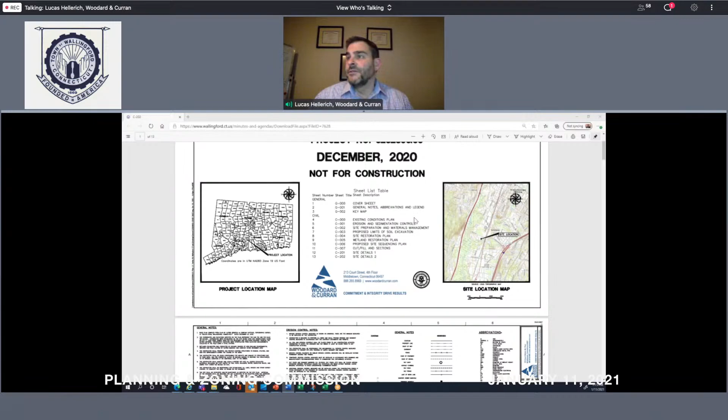Mr. Chairman, may I share a plan with the commission? Absolutely, what I will do is make you a presenter, and that should— you should be able to do that. Okay, you should be designated as a presenter now. Okay, so this is just our project drawing set which was submitted. Let me start here. Again, thank you, Commission.

This is a wetland soil remediation project. It was approved by Wallingford Inland Wetlands and Watercourses Commission on January 6th. During this presentation, I'll start with an overview of the project, including some background information as well as the proposed schedule. We'll also discuss details related to the restoration plan, and conclude with several additional points related to the application.

As has been discussed, a number of project documents have been submitted. We submitted the original permit application and a complete set of revised project drawings, which incorporated all of the edits requested through the Inland Wetlands Watercourse Commission review process. There were several comments issued by the Planning and Zoning town planner, and we responded to those comments in a letter dated October 29, 2020 from the planner. We also submitted a contingency plan for potential flooding and erosion and sedimentation.

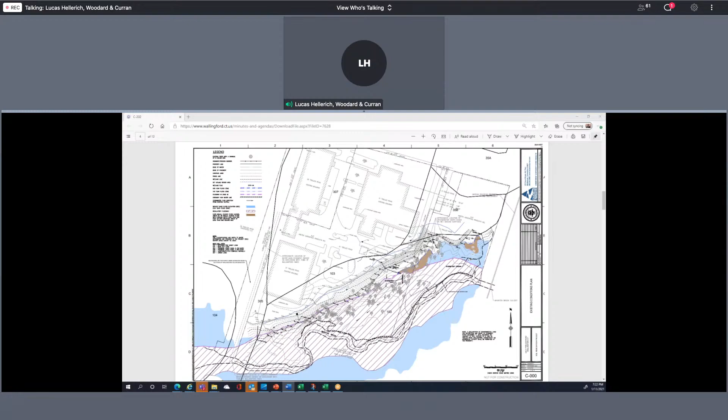On the sides of that center, we have 6-inch deep excavations. About that time, in December of 2019, we also had a pre-application meeting with both Inland Wetlands and Planning and Zoning. There were some concerns raised about the removal of all the trees, the fact that the project is within the floodway, and the potential for erosion into Wharton Brook.

In response to the meeting comments that were raised, and the soil sampling that we conducted around that time, we also conducted a tree survey. We approached Connecticut DEEP's Remediation Division, and we worked on a plan to retain those large trees and only remove soil to the top of the tree roots, so 6 inches, rather than clear cutting all those trees, which is typical for a remediation project. Connecticut DEEP agreed with that approach.

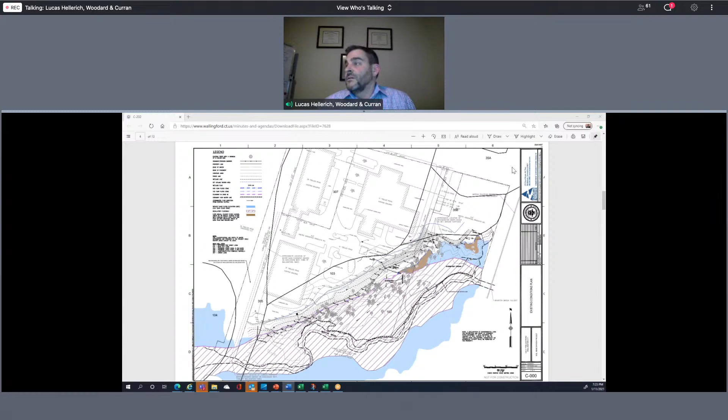Also, we prepared a contingency plan to address flooding concerns. Let's go on to another figure here.

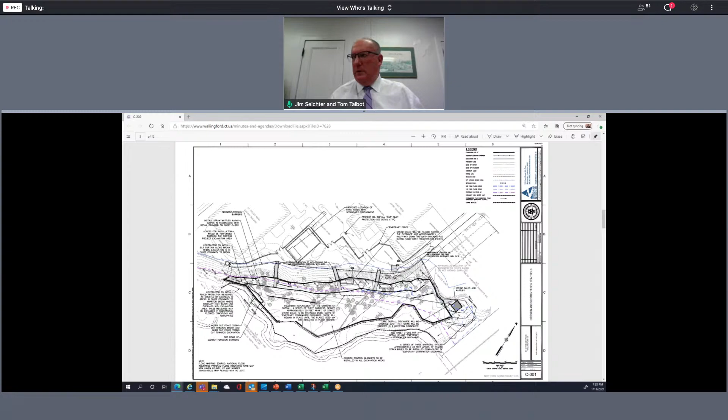Okay, this next figure is the erosion and sedimentation controls figure. I'll just briefly walk through the approach sequence here. The project would start by mobilizing to the site, mobilizing equipment, erosion, sedimentation controls, and other materials required for a construction project like this.

We would identify all trees that would be retained. We would install erosion and sedimentation controls, which really consist of a number of different devices.

Silt fence, straw wattles, a double row near Wharton Brook, straw wattles within the excavation itself, and a water diversion structure. If you look on the figure, this clouded area along Wharton Brook represents the lowest point of the project. In that area, we would proactively install a temporary water diversion structure, which would mitigate high water from that brook from coming into the excavation.

We would also install a turbidity curtain in the brook, and we have extra stocks of erosion and sedimentation controls available on site. In our contingency plan, we also lay out additional measures to respond to various precipitation events.

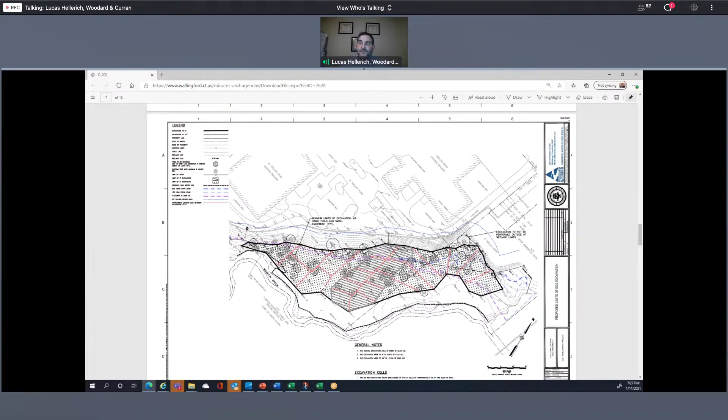I'm going to go back to C-202. If you look at the center of the figure here, you can see there's a bold black line, kind of an odd shape that surrounds this area. That represents the total excavation area.

Within that area, there are two thicker gray lines that go from north to south. Within those two gray lines, that's the 2-foot excavation area. And then on either side of those gray lines, there's a 6-inch excavation area, one on the east and one on the west.

Once those excavations are performed, we would backfill in the 6-inch areas with an organic topsoil to mimic conditions in the wetland. And then in the 2-foot excavation area, the top 12 inches would be backfilled with an organic topsoil.

The bottom 12 inches within the excavation would be backfilled with a sandy loam soil, which is similar to what exists at the site. Backfilling would be prioritized around those trees, and it would also be prioritized in the lower elevation areas as well, to allow for the most time for site stabilization to occur.

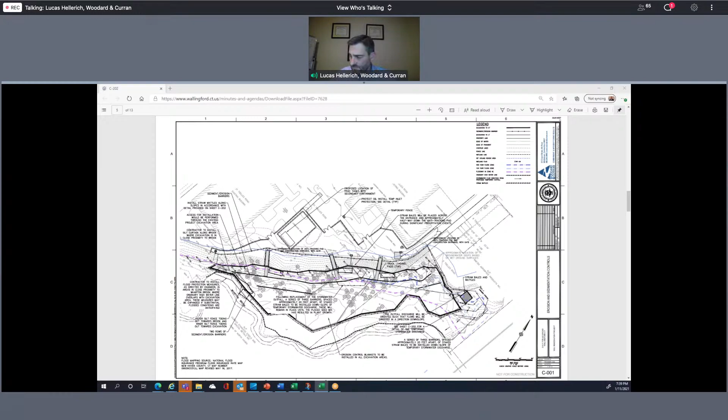Okay. And then I noted on your presentation, you talked about the project schedule, and it said late spring, summer, could take several months, should be several weeks. I guess, could you further quantify beginning to end, how many weeks is this expected if the weather conditions are ideal?

So incorporating all the steps of mobilizing the site, establishing erosion sedimentation controls, clearing trees, establishing the temporary stormwater, performing the excavation work, performing the backfilling work, restoration work, I think all that's going to be somewhere on the order of 12 to 16 weeks, all told.

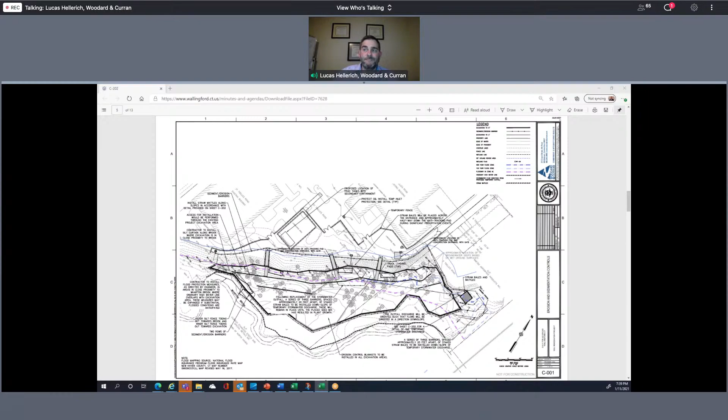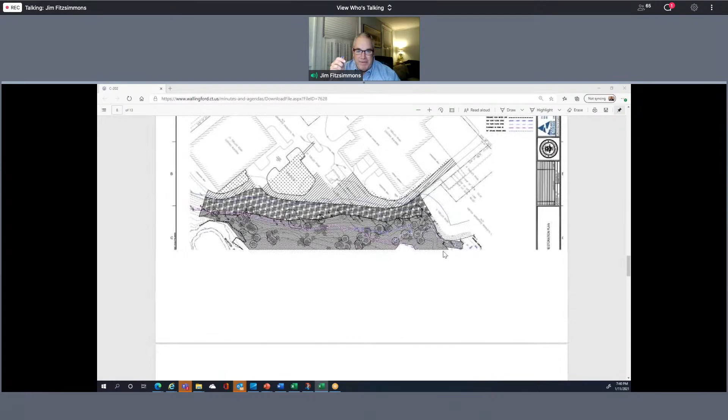Okay. And if I could add, the chairman had some questions regarding the temporary staging area, and I guess I too am concerned about it. I heard your answers to his questions, but you have three particular areas. What would the height be of those areas, the maximum height of those particular areas?

Let me see if I can find the detail for you. We don't list the maximum height here, but it's going to be something on the order of 8 to 10 feet at most.

And so the 8 to 10 feet would be, if I understood your explanation, always covered in plastic at the end of the day and secured. And the most they would be there would be several weeks. Correct. And, oh sorry, go ahead.

So yeah, at the most it would be several weeks, but I anticipate it could be as short as a couple days. Once a certain volume of soil has been excavated and placed in that temporary location, it may only be there a couple days before it's shipped off site. But it may need to stay there a bit longer as well.

And then, I'm sorry, I'm going to go back to the trucks. The truck route is going to be Toelles to 5 to 91, or is there a different area? Because I heard you say, and I don't know if you weren't clear, do you know where the contaminated soil is going and where the new fill is coming from, as it pertains to truck traffic? Right, there are several potential disposal locations.

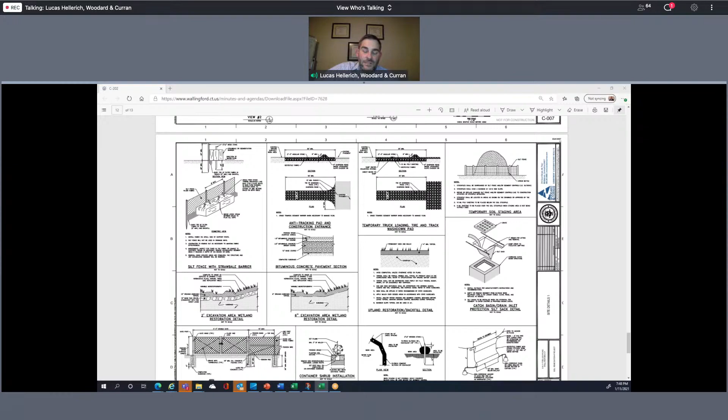So this project, this site is subject to the Connecticut Transfer Act, the Property Transfer Act. There are a number of areas of concern on the site that have already been remediated, dealt with. This represents one of the last areas on site to have that remediation done.

So that's the driving requirement, the Property Transfer Act, and the remediation standard regulations need to be complied with to complete the remediation of this wetland.

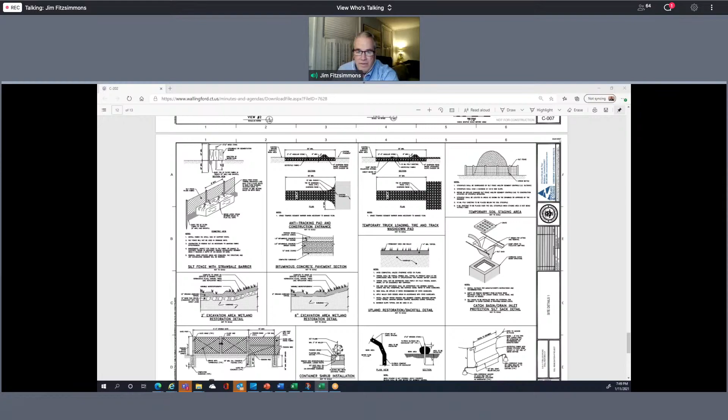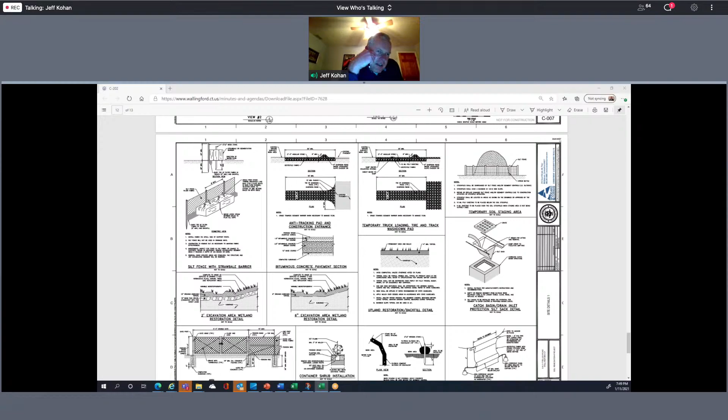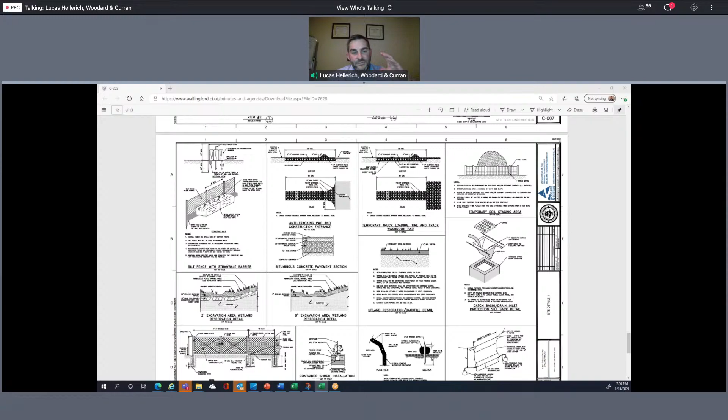Following on Commissioner Fitzsimmons's question, do you know what the concentration is of the contaminated soil as far as the nickel, and how that concentration compares to an unacceptable level? The nickel concentration, I don't remember the specific maximum value, but I think it's on the order of several hundred milligrams per kilogram. It's below the human direct exposure standard, but site-specific ecological toxicity testing using site soils developed a number below that several hundred milligrams per kilogram of nickel on site. So there is nickel above that site-specific toxicity limit, and that's how we define the limit of excavation, to remove that concentration of nickel.

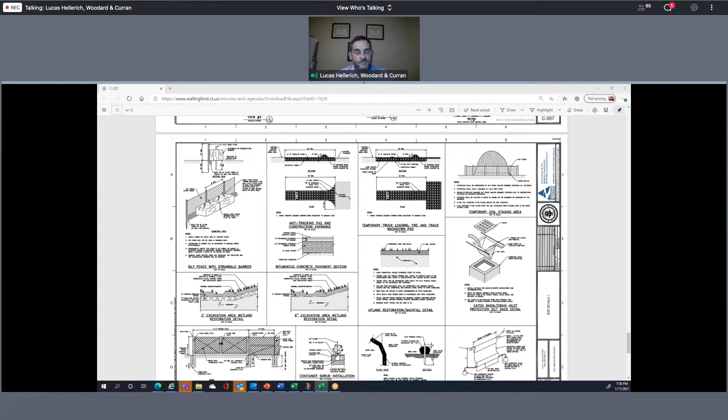So what I understand is the entire site is not over that limit, it's just specific areas you've tested and found above the acceptable range. Yes, it's soil in the top 6 inches. This bold black shape represents the excavation limits. We have soil within the top 6 inches of the western and eastern thirds of this area, and soil in the top 2 feet in the central portion that contains nickel above that standard.

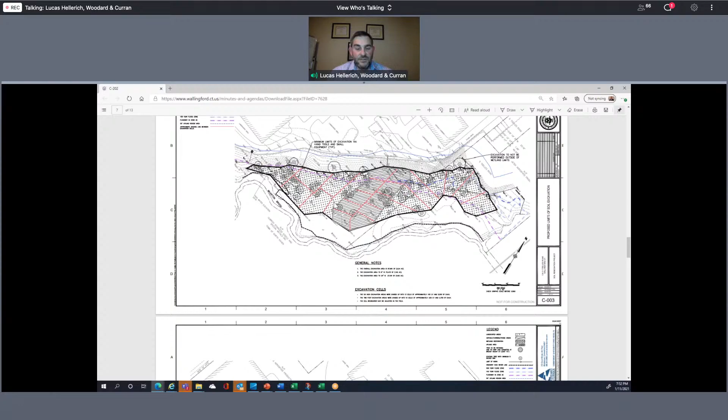Okay, I was a little unclear as to when your projected start date will be. Right now we're anticipating the projected start date would be late spring, something like late May, early June timeframe.

One of the things I'm going to ask about - I'm sure the Wetlands Commission did a great job, I read through a lot of their concerns, the protocols and procedures. I think they did a really great job getting all the environmental wetlands concerns contained. But I didn't see anything, and you didn't mention today, on your Eastern box turtle protocols.

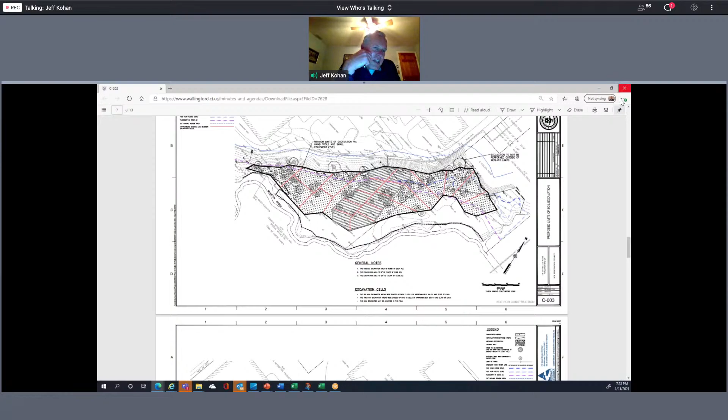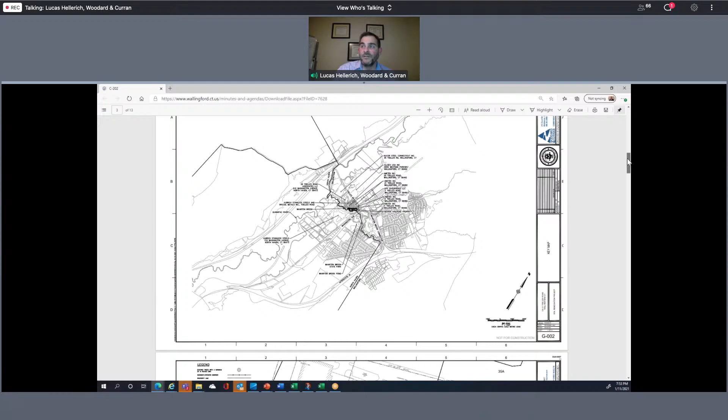Have you reviewed the site yet to see if there are any of those turtles out there? Well, there was a tabletop review done that identified the Eastern box turtle as a species of special concern in this area. Let me check my notes here. We did include Eastern box turtle protocols.

Yeah, I'm looking at it. And what we're going to do is have a qualified herpetologist with expertise in the Eastern box turtle perform a pre-construction survey at the site. As part of the inland wetland comment response, we incorporate these protocols as well - that herpetologist will visit the site during construction to conduct inspections for the turtle. The herpetologist will also provide training, and we would develop a plan prior to the start of the project to train the construction staff in identification and proper handling of the Eastern box turtle, so that if the herpetologist isn't there on a particular day, staff know what to do if they encounter one.

Okay, fantastic. And my last question, dovetailing on a comment Mr. Fitzsimmons made - I noticed in our notes that DEEP reviewed the plan but didn't offer any comments back, and our own engineering department also reviewed it and didn't have any comments one way or another. I'm sure they gave you feedback, and no comments, I guess, are good comments. But I just want to ask, in conversations between those two parties, were there any other concerns that may not have been shown here? I would not think so, but I'm just not seeing any feedback at all.

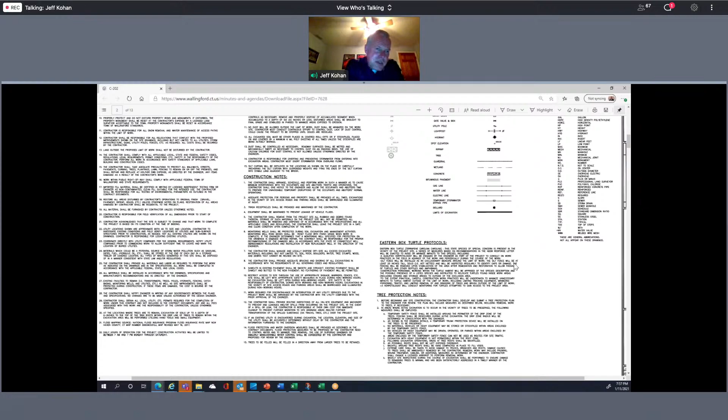Okay, good enough. Based on the documentation here in your presentations, I'm pretty pleased with the plan. So thank you. Thank you, Mr. Kohan.

Mr. Matarazzo, any questions for the applicant? No, Mr. Chairman. Thank you. Mr. Hine.

Thank you, Mr. Chairman. I just have a couple follow-up questions. You did mention Connecticut DEEP and the Army Corps of Engineers and the US EPA had all reviewed your plan. We just talked about Connecticut DEEP, but with respect to the Army Corps of Engineers and the EPA, did you actually get approvals from them, or was it just that they reviewed your plan and didn't have any comments?

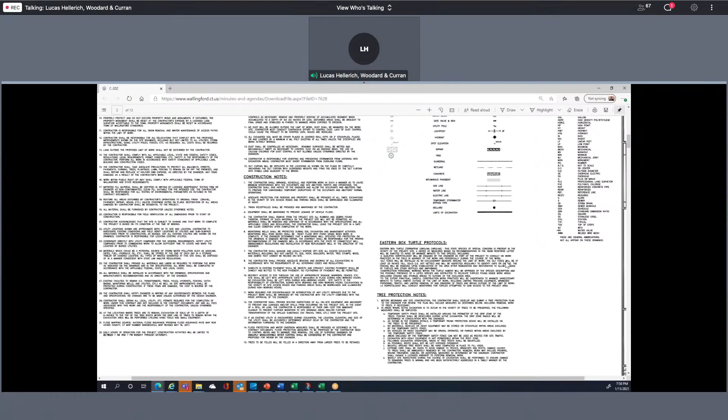Army Corps, we're still waiting on the permit approval from Army Corps. It's a general permit that we're seeking from Army Corps. And we did have discussions. They had some questions, really to review the plans that we've submitted. They've asked that as we revise these plans, we send them the updated versions to make sure they have the revised versions.

US EPA reviewed in terms of the inland wetlands restoration plan. So US EPA had provided their comments to Army Corps, and they agreed with our restoration plan in terms of the plantings, the monitoring protocols, and the invasive species work as well. But we are still awaiting an approval from Army Corps. And do you need that approval before you can begin? Yes.

You also mentioned your monitoring protocol after the project is complete. I think if I understood you correctly, you said that the monitoring would continue until full performance metrics were met. I was a little unclear as to what that means. What metrics are you looking for, or are you looking to attain?

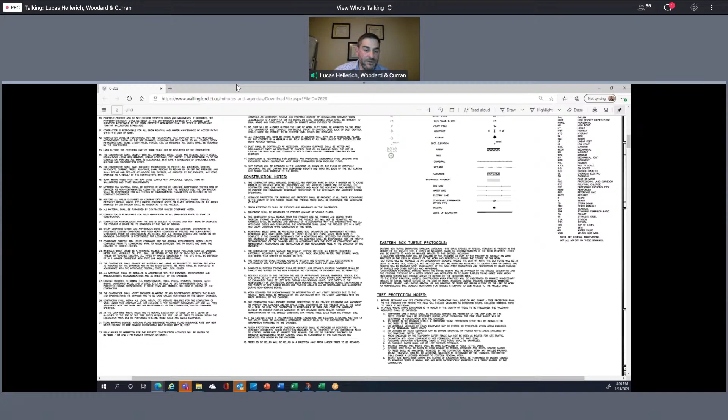So it might be a good idea to have Kyle Papigian, one of my colleagues, respond to that, because he was one of the primary authors of that plan. Sure, this is Kyle Papigian, I'll jump in here.

Like Luke had said before, the goal is really to meet these performance standards that we've established in the wetland restoration plan. They're around making sure that the site is stable, that the soils are stable at a baseline level that needs to be met. There are also several criteria related to vegetation cover, so there needs to be an adequate level of vegetation across the site, and then an adequate amount of woody vegetation, trees and shrubs, and coverage of those types of species at the site.

There also needs to be a demonstration that the trees and shrubs are growing on a year-to-year basis, because it is a floodplain forest, so we want to make sure that habitat heterogeneity is maintained in the future. And finally, there are metrics related to invasive species, maintaining coverage as low as possible on the site and below a total cover of 10%.

So in order to ensure those criteria are being met, the site will be monitored twice a year for up to 10 years using monitoring plots that will be established so they can be visited on a year-to-year basis. There'd be no discussion of ending the monitoring until at least two of our monitoring reports indicate that those criteria are met.

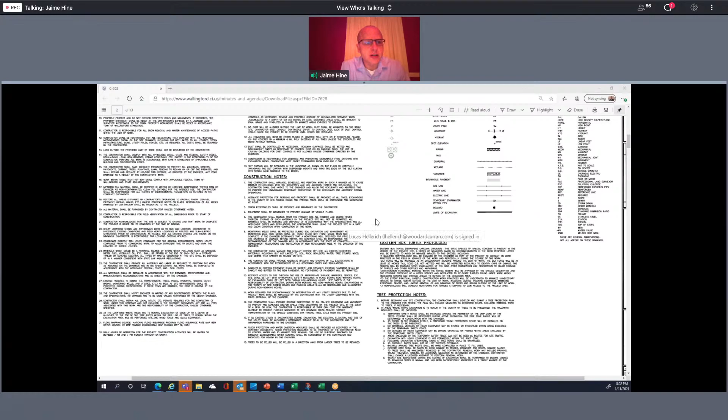The other question I had is that earlier there was a diagram that was put up that showed each of the cells that would be excavated and then filled. I was just wondering, if I understood correctly, each cell would be excavated separately. Will there be some sort of barrier put around each cell as it's being excavated in any way to prevent contamination?

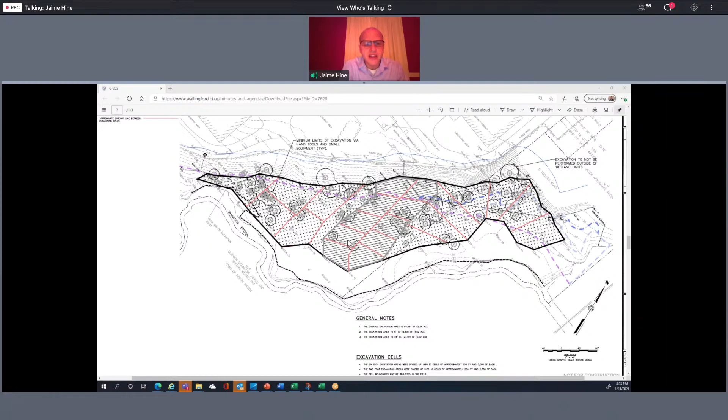Well, so this is the diagram that you mentioned. Each excavation cell is approximately— the 6-inch cells were designed to be about 100 cubic yards each in volume, and the 2-foot excavation cells were designed to be about 200 cubic yards each. In terms of barriers, in the 6-inch areas, we would envision that we would have to mark out those cells in the field, and the excavation would go down 6 inches. We did not envision placing a barrier between the cells, just because of the shallow depth of that excavation.

In terms of the 2-foot area, again, it's a 2-foot deep excavation, and we didn't envision placing a type of barrier between an excavated and unexcavated area. We don't envision there would be significant movement of soil between the cells, given the nature of the organic soil that's out there right now.

Yeah, fair enough. And just so that I understand the process for each cell, each cell will be excavated.

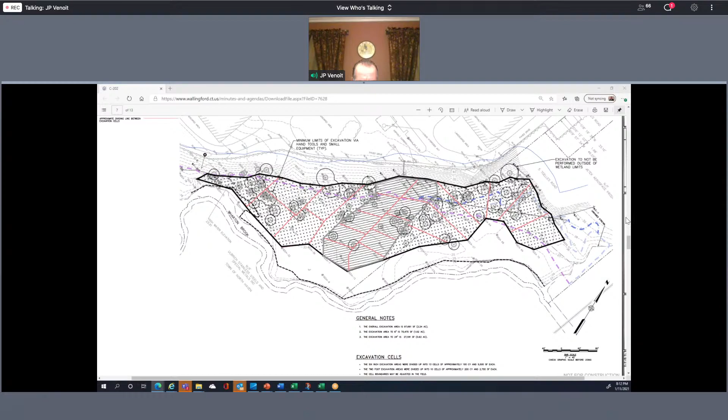Dated August 2020, amended to December 2020, subject to: 1, comments and interoffice memorandum from the fire marshal to the Planning and Zoning Commission dated August 12th, 2020. 2, comments in interoffice memorandum from Eric Kruger, Senior Engineer, Water Sewer Divisions, to Aaron O'Hare, Environmental Planner, CC to Thomas Talbot, Town Planner, dated August 27th, 2020.

3, comments in interoffice memorandum from the Department of Engineering to Thomas Talbot, Planner, dated January 8th, 2021. Number 4, comments in interoffice memorandum from Aaron O'Hare, Environmental Planner, to Thomas Talbot, Planner, listing all conditions of Inland Wetlands Commission approval, number A20-7.1, dated January 8th, 2021. All conditions of that approval incorporated into application for special permit number 409-20, with the exception of condition number 12. And number 5, sedimentation and erosion control bond of $20,000.

And Mr. Venoit, if I could add just one more, the obtaining of an Army Corps of Engineer general permit.

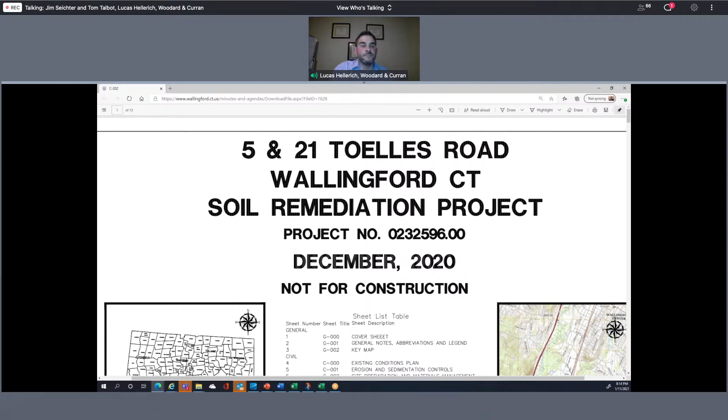Okay, it brings us to our next item. It's a continuation of a public hearing. It's a zoning text amendment, sections 4.9 IX, section 4.10 I5, and section 4.13, the Watershed Protection District, 2.1 and 5.1C.

And I'd ask Mr. Matarazzo if you would please read all additional correspondence for this application. Mr. Chairman, we have correspondence, Office of the Mayor, dated January 5th, 2021, to your attention, Chairman Seichter, and signed by the Mayor, William Dickinson, Janice Small, Law Department, Timothy Ryan, Economic Development, and Rick Hendershot, Director of Utilities.

Good, and if you would, because it's a relatively short memo, would you please read it too for the record? Sure.

Referencing zoning text amendment, sections 4.9 IX, section 4.10 I5, and 4.13 WPD, 2.1, 5.1.C, 6.1.C, and 6.12.B. Dear Commissioners, due to the serious legal and policy concerns about the proposal changes, we are requesting additional time to develop thoughts and language for consideration of the Planning and Zoning Commission regarding the 902-20 application. We request that the current amendments be withdrawn. The undersigned will be meeting to articulate relevant language and will provide such work product by March 31st, 2021 at the latest. Thank you for your consideration.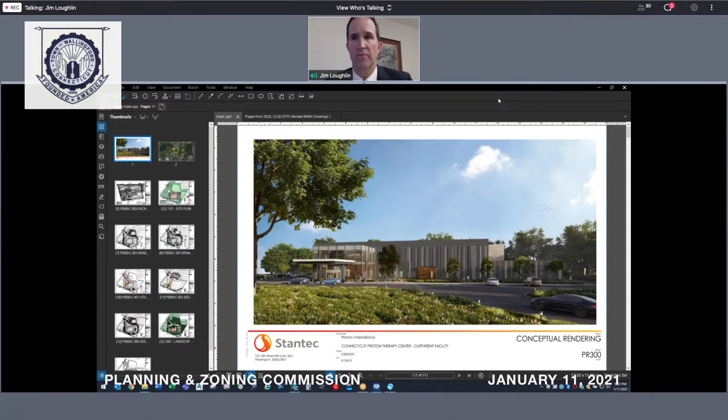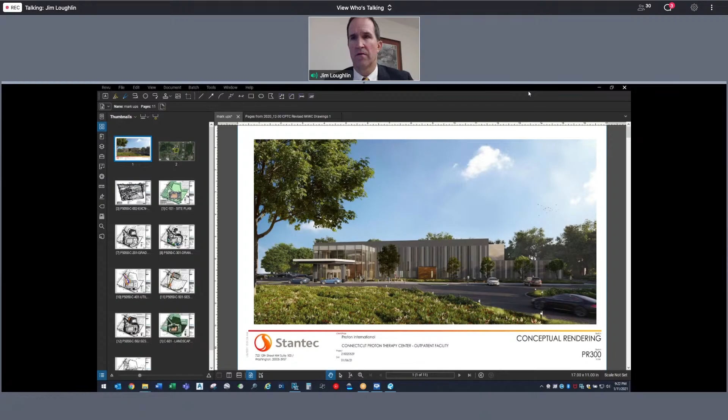There is a rendering coming in from Northrop Road. Architecturally, we have 3 architects on staff here tonight who could comment better than I can. It's a pastoral setting—we've preserved as much of the trees as possible. Everything in its design is meant to ease the entrance of the cancer patient from Northrop Road into the facility.

You'll see the atrium there is full height and glass, and the waiting area is really well sunlit. In addition, there will be some visibility from I-91 that will also make travel to the site a lot easier. It's 2 stories, with all entrances on the first floor. The pastoral setting on the outside is designed to relax the patient and ease access, and the layout inside during the waiting period, with only 1 treatment room, is all designed to cater to the patient.

Please direct any questions you might have on the design to the architects, because obviously my knowledge is limited. Thank you for that, Mr. Chairman. If there are no more questions for me, I'd like to move on to Andrew White.

Thank you, Jim. I'll now walk you through the site itself.

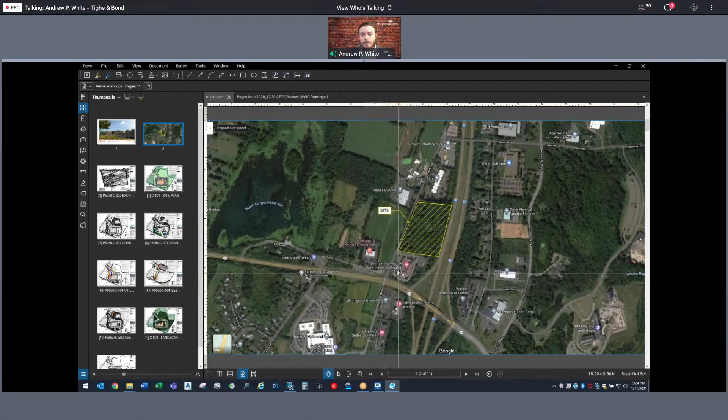As Attorney Laughlin mentioned earlier, our site is located north of the Marriott, on Northrop Road, north of Route 68, and west of Interstate 91. All access to the site will be via the exit ramp to the south of the property and then north onto Northrop Road. The existing site is 11.79 acres, almost entirely wooded.

There's a man-made drainage swale that runs north to south through the site. For your orientation, north is oriented to the right of your screen. There are a series of catch basins on Northrop Road that discharge onto the site. Approximately 90% of the site stormwater, any rainwater that hits the site now, comes down to a culvert located on the south edge of our property, a 24-inch pipe that goes beneath the Marriott's parking lot. A small corner of the site discharges directly to 91.

The site plan itself, for the remainder of these sheets, north will be to the top of your screen with Northrop Road on the left-hand side. As we mentioned before, we received a parking variance for 50 parking spots. We have our site driveway off of Northrop Road that comes to the front of the building. The front entrance is located on the north. The majority of the parking is located to the east, as well as additional 9 spaces to the north, and then 2 loading spaces and additional spaces to the west.

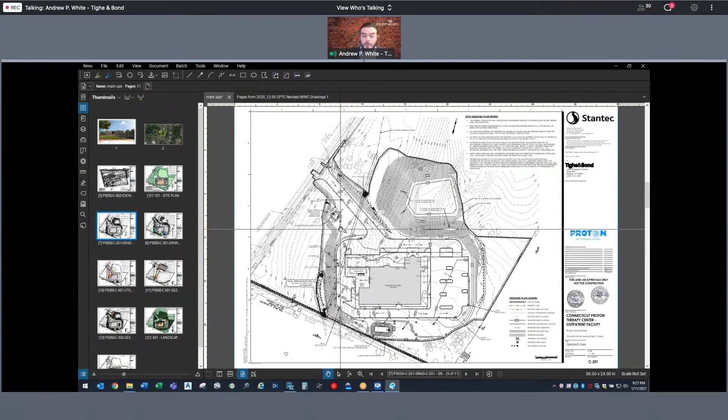Site grading is very nominal, between 4 and 2% slopes throughout the parking lot. There are 3 to 1 slopes on the west side of the site, as well as slopes surrounding the site in the swales. In addition, when talking with the water department, we have provided sand filters to meet their stormwater requirements, which I'll now discuss in more detail in the stormwater design.

This site, as I mentioned earlier, has a drainage swale running north to south. We're proposing to intercept that drainage swale through a 24-inch culvert to route it through our driveway and then discharge about 100 feet north of the existing 24-inch culvert at the south end of the property.

Per Wallingford Water Department regulations, we have 2 stormwater systems. We have storm drains that collect exclusively from landscaped areas, shown in dark blue, that discharge to swales, ultimately to the 24-inch pipe. Then we have the drainage system highlighted in cyan, which picks up paved areas and goes to 2 sand filters, as well as water quality hydrodynamic separators, per the aquifer watershed protection requirements.

The building itself is treated as clean water and has a subsurface underground infiltration system. The rainwater discharge from the parking surfaces, after the sand filter, goes to its own underground infiltration system. So for this project, we are reducing peak flow offsite and volumetric runoff offsite, and there will be no impact downstream.

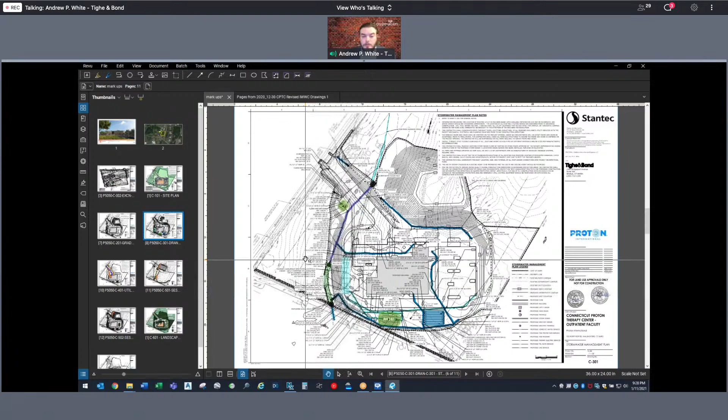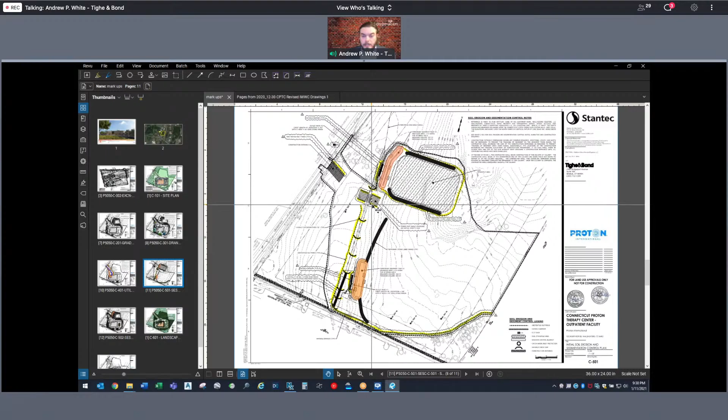During the construction process, we have fully compliant State of Connecticut soil erosion control methods. For this project, due to the presence of that drainage swale, we have broken our soil erosion controls into 2 phases. The first phase, as shown here, is for stripping the site of its organic topsoil and protecting the swale and access to the site. We have 2 temporary sediment traps shown in this first phase, one for our stockpiling activity, the second for the majority of tree cutting and clearing, as well as hay bale check dams in the drainage swale, silt fence construction entrances, and even temporary timber swamp mats for vehicular traffic across the drainage swale.

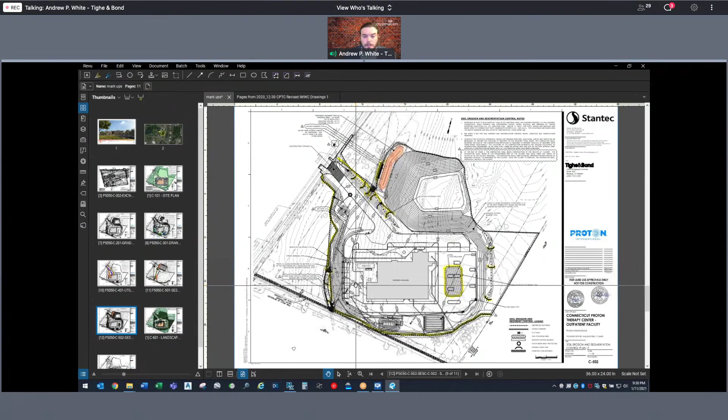For the second phase of soil erosion control, this is as the building is more advanced. As the foundation goes in, the first sediment trap would be decommissioned after the culvert is installed and bypassed, and the site begins to be raised. The second sediment trap stays for the north area, and we have stockpiling within the parking area as it's flattened out, and then perimeter controls throughout the site to maintain any silt and sediment coming off the site.

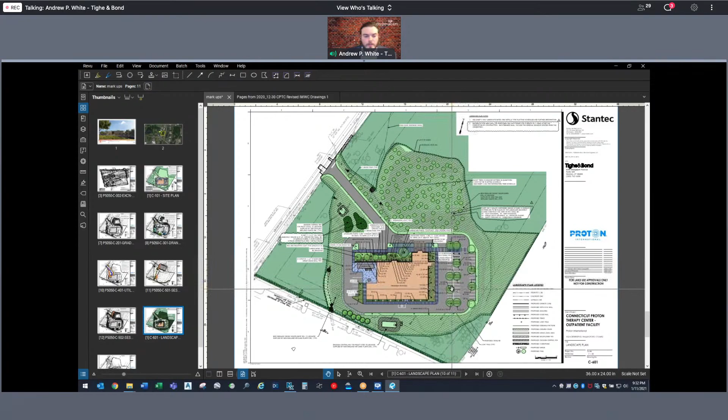And our last plan I'll show you is our lighting plan. We have poles located around the lot to provide approximately 1-foot candle average light around the driveway and building, as well as decorative light bollards as you're coming down.

And then the front landscape area will have little 10-inch tall bollards along the front walk to provide some additional ambiance lighting, not so much as site lighting.

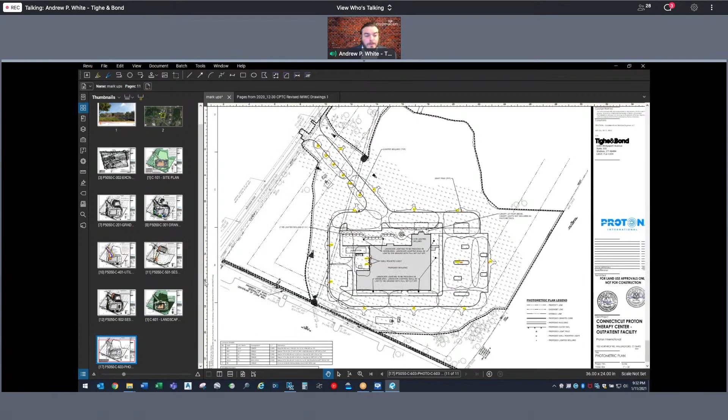And that is the project in a nutshell. I'd love to open it up to any questions from the commissioners.

Attorney Lockland, I take it at this moment this is the extent of your presentation, is that correct? Yes, Mr. Chairman.

All right, so at this point in time, I would open this up to questions from commission members. And again, we will start off this time with Mr. Venoit. No comment. Thank you.

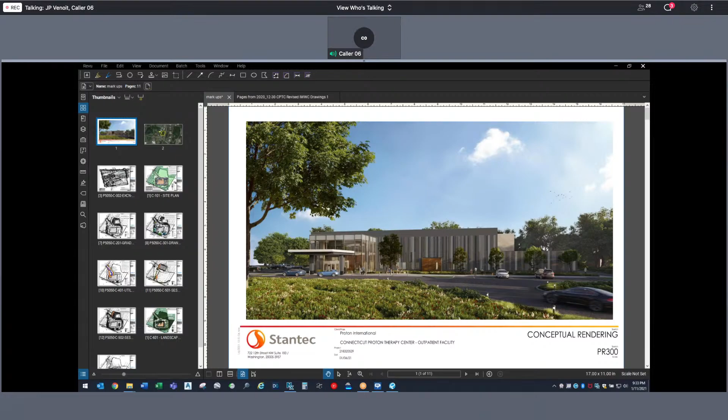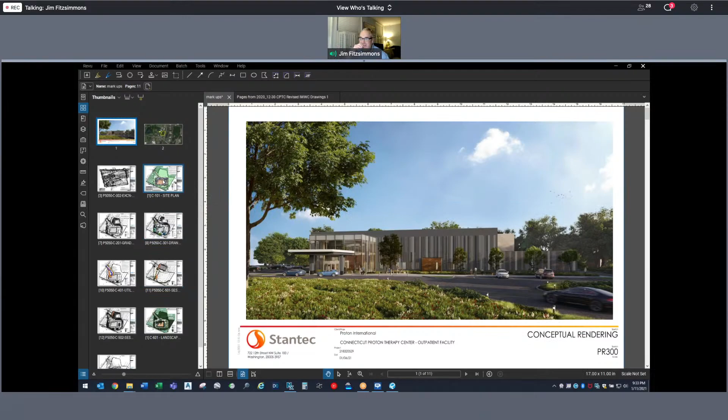Mr. Fitzsimmons: Thank you, Mr. Chairman. Just a question. I think it's a very interesting design, but as you were going through the presentation, I was trying to determine the front of the building, because Wallingford has a building orientation zoning requirement, and it looks as if the building is askew on the lot. Where is the front, and is it facing Northford, or is it on the side view of Northford?

Go ahead, Andrew. The front of the building, if you can see my cursor here, is oriented to the north. So this protrusion of the building, where the car canopy is, is the main entrance. So as you're coming north on Northford Road and take a right into the site, you have a direct line of sight to the front face of the building, which is the view shown in the rendering. So while the building is not directly perpendicular to the road, along your line of sight entering the property, you have a direct view of the front of the building.

I guess my thought would be, I would envision the majority of the traffic would be coming from the other direction. You wouldn't be getting much coming from Northford to 68, to be coming off 68 onto Northford. Correct. Yeah.

I guess, if I could, Mr. Chairman, through you to Mr. Talbot, is this plan in conformance with our zoning building orientation requirement?

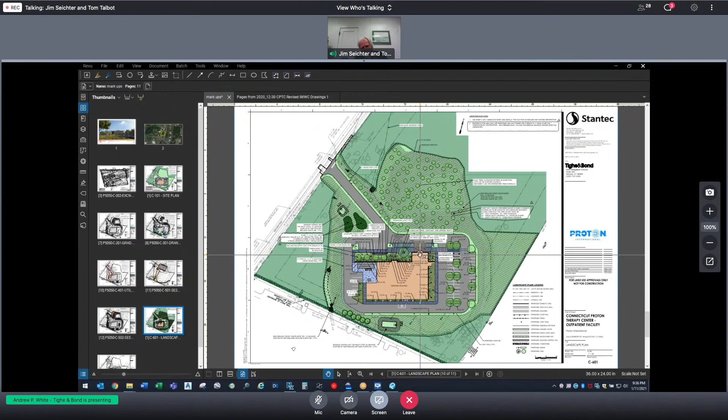I'm hearing you. I would say substantially it is. I think it meets the general intent of the regulation. I understand your concern that it's not lining up directly with the street. This is the first time I've encountered this regulation here in Wallingford. That kind of regulation with front entrances is usually more of an urban regulation where everything's along the street, and you're trying to orient along the street. Here, you're a couple of hundred feet off the street, so I think generally it does comply. It complies with the intent.

Okay. Without moving the building, where else would you put the entrance to make it more in compliance, I guess, would be what I'd say. Does that make sense? It does, and I appreciate your comments, Tom.

I think my concern was just, I know we had put that regulation in the books just a couple of years ago, and it was because of retail. There was a retail application that skewed the building. But this is, you're right, it's a pastoral setting. I mean, the applicant said it themselves. I don't want to be saying well, we approved it, but it doesn't conform. If your position is it substantially conforms, I tend to agree, it's just angled differently, and it's not going to be a straight angle.

Other than from looking at the plan, if it was to the left, the south side, you could say that it's more in compliance, but it's not at all in the spirit or the intent of the regulation, and the other two sides, not at all. So this is a situation like this, you kind of have to do the best you can with that regulation, I think. Because you referred to retail, it's not just an urban thing, it's also a highway thing.

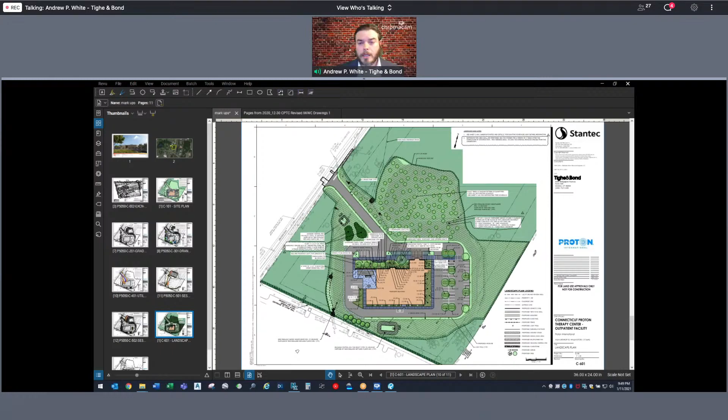Due to our coordination with them, there was one set of drawing revisions issued as Delta 1. Then in our continued correspondence with Tom Talbot's office and the town engineer, there were some additional minor comments that were brought, and these were classified under revision 2, which is the latest and greatest that we have submitted.

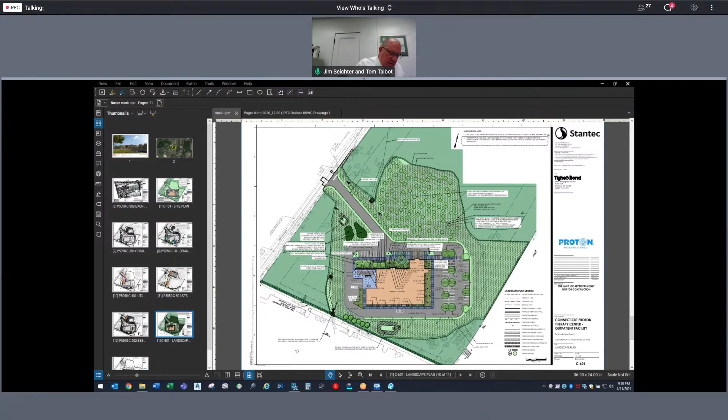Okay, but again, I don't mean to belabor the point, but when I total the spaces, eliminating the parking, I only come up with 48.

I guess just to make it easy, and maybe I'm missing 2 spaces, but when I'm looking at your plans, which would be the front of the building, to the left you have 9 spaces. Then there's 2, then there's 4, then there would be 20 spaces by eliminating the handicap, and then 13. Again, maybe I'm...

So the handicap spots are included in those 50, as I said earlier. The circles on the plan on the screen with the number in them indicate the number of spots within a row. So proceeding right here at the number 3, an additional 3 is 6, another 4 is 10, and then the 2 handicap is 12. Additionally, the same thing on the other side, another 12. And then on the far eastern row is another 13.

So by my count, that is 37 spots in the eastern lot, 9 spots along the frontage, 9 spots brings us up to 46, and then you have the 4 additional parking spaces on the west side of the building, which brings you to 50. And then we have the 2 loading spots, which are not considered parking spots.

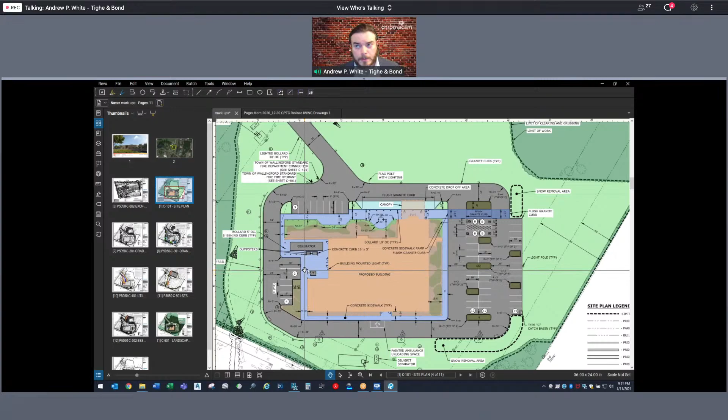Oh, okay, that's my error. I was looking at those as parking spaces. I apologize for that, and I apologize for dragging this on. No trouble, happy to answer the question. Good, thank you.

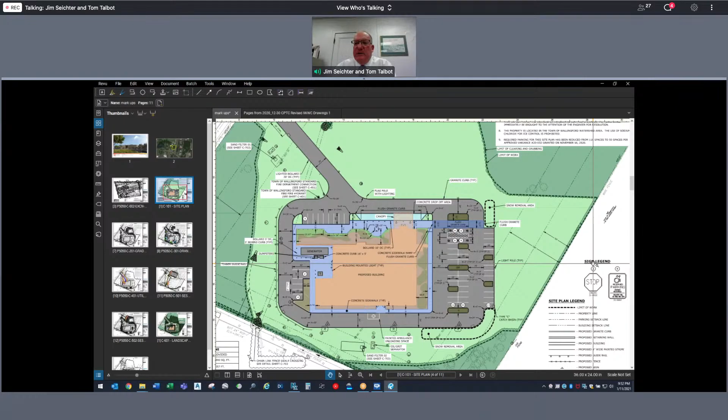Okay, this is not a public hearing, but we do allow members of the public to comment. Are there any members of the public that would like to comment? I noticed that Mr. Ryan had made a comment that he may want to comment on the gate being referred to. I'm not sure if Mr. Ryan would like to do that, or if he would like to make any comments on the application. So, Mr. Ryan, you'd like to speak? You may speak.

Yes, Mr. Chairman, I just want to confirm that you can hear me okay? Yes, we can. Very good.

Well, I want to just thank the commission for what appears to be their overwhelming support of this application. This has been a journey of several years. It's coming to fruition this evening. I also want to thank Mr. Carboni, who has been absolutely fantastic to work with.

He has delivered every item on time, in detail, and has worked very well with not only myself but other members of the town staff. As has been echoed already, I think this is a fantastic opportunity for Wallingford for all of the reasons already stated, so I'll keep it short. It's great, I think it's been 2.5 years, Peter, and it's great to see us come to this point, and we're almost home. So again, I anticipate and thank the commission for their overwhelming support.

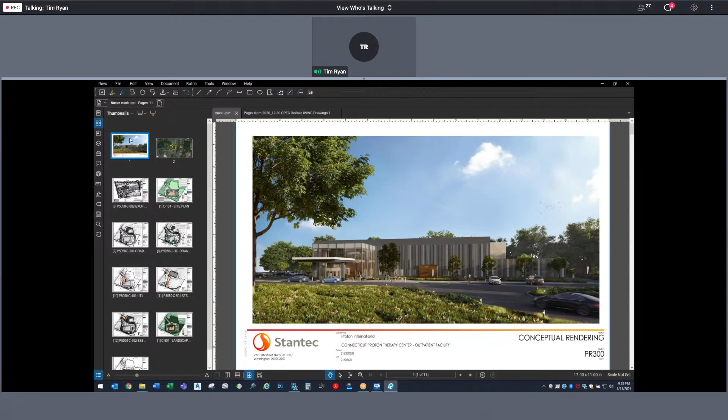Thank you, Mr. Chairman. Thank you, Mr. Ryan. Any other members of the public that would like to comment on the application? I don't see any, and I don't see that there are any callers on the line.

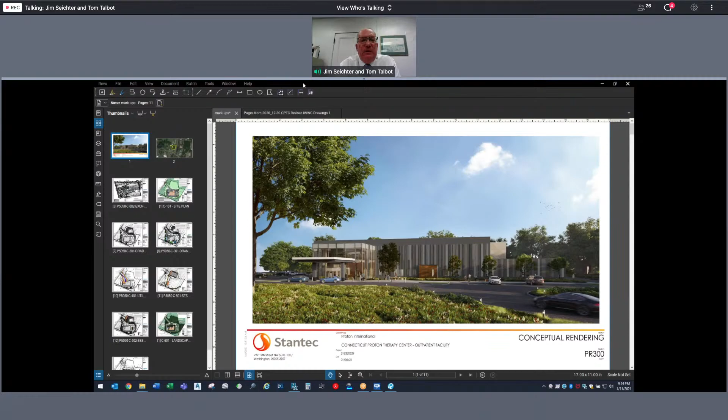So with that, I would again bring it back to the applicant. If the applicant would like to make any final comments, certainly you're not obliged to, so I leave that with the applicant. I think we're set, Mr. Chairman. Okay, and I take it all commission members have no further questions. That being said, at this point, I would entertain a motion on the application.

Mr. Chairman, I make a motion that we approve application 221-20, site plan application for Proton International for a 27,810 square foot outpatient medical treatment facility on 11.82 acres as shown on plans entitled Connecticut Proton Therapy Center Outpatient Facility, Proton International, 932 Northrop Road, dated December 1st, 2020, revised to January 6, 2021, subject to: 1) comments in Interoffice Memorandum from Eric Kruger, Senior Engineer, Water and Sewer Division, to Aaron O'Hare, Environmental Planner, CC to Tom Talbot, Planner, dated January 5th, 2021; 2) comments in Interoffice Memorandum from the Fire Marshal to the Planning and Zoning Department, dated December 18th, 2020.

Comments in the Interoffice Memorandum from Aaron O'Hare, Environmental Planner, to Thomas Talbot, Planner, listing all conditions of Inland Wetlands Commission approval, A20-12.1, dated January 8th, 2021. All conditions of this approval are to be incorporated into the application for site plan 221-20, with the exception of condition number 1, bonding. Number 4, comments in the Interoffice Memorandum from Eric Kruger, Senior Engineer, Water and Sewer Division, to Thomas Talbot, dated January 7, 2021. And 5, a sediment and erosion control bond of $30,000.